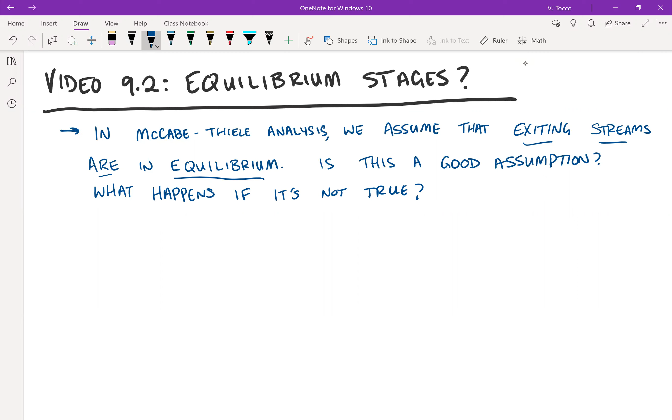So first, in order to understand what equilibrium is, we first have to understand what's actually going on when vapor contacts liquid in a distillation column. So here's a cartoon that I just drew. Vapor bubbles are contacting the surrounding liquid, and this interface between the bubble and the surrounding liquid is what mass is transferring into or out of. So stuff is evaporating from the liquid phase to go to the vapor phase, and stuff is also condensing to go back from the vapor phase down to the liquid phase.

So in order for these two things to actually reach equilibrium, I need sufficient surface area, and I'm talking about surface area of vapor bubbles to the surrounding liquid. And I also have to have sufficient time. I have to have this vapor and this liquid contacting each other long enough for equilibrium to occur. Now, how long does equilibrium actually take to occur? That's something that you might be able to determine experimentally, but oftentimes we don't have a really good estimate for that. So you may want to overestimate, but then there's no real good way to control that either.

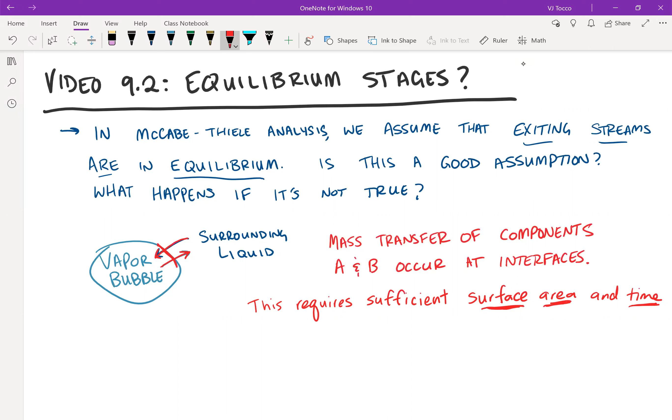So instead of having an equation that accounts for the surface area and time in a lot of detail, how it's usually accounted for in practice is with the concept of a Murphree vapor efficiency. So the vapor efficiency has a variable name E sub mv, and it quantifies deviations from equilibrium. So in this formula, Y sub n is the actual composition of vapor leaving stage n. Y n plus 1 is the actual composition of vapor coming in from stage n plus 1. So remember, this is the stage below.

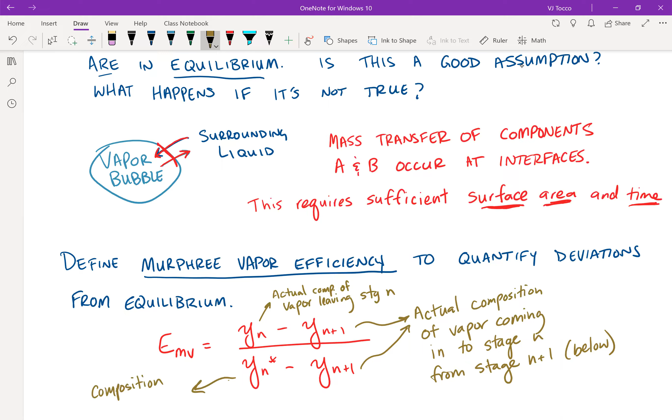And then finally, this Yn star is the composition of vapor that would be in equilibrium with the liquid leaving stage n. So by breaking this equation down a little bit, you can easily see that if Yn is equal to Yn star, that means that the actual composition of vapor leaving stage n is equal to the composition of vapor that would theoretically be in equilibrium. And if this happens, then E sub mv is equal to 1 or 100%. So that means I have a perfectly efficient equilibrium tray if my vapor is actually getting to the theoretical equilibrium that I have. So how does this help you in practice?

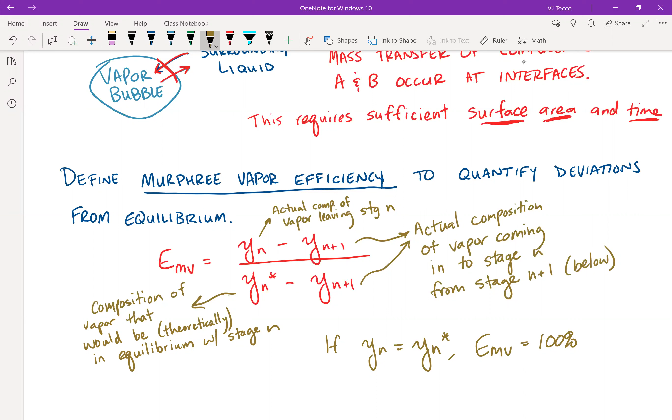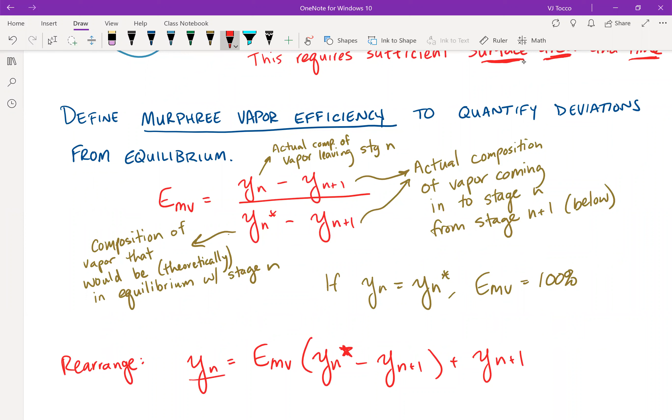So what you can do with this EMV equation is rearrange it to solve for Y sub n. If I rearrange this Murphree vapor efficiency equation, I can obtain Y of n is equal to EMV times (Yn star minus Y sub n plus 1) plus Y sub n plus 1. And now this is an equation for Y in terms of Y star, right? Well, not a straight line, but you can derive it by knowing what Y of n star is. So I can substitute that. For Yn star, you can substitute alpha xn over 1 plus (alpha minus 1) xn. And these are all things that you would theoretically know. The last thing you'd have to do is to estimate what this EMV is.

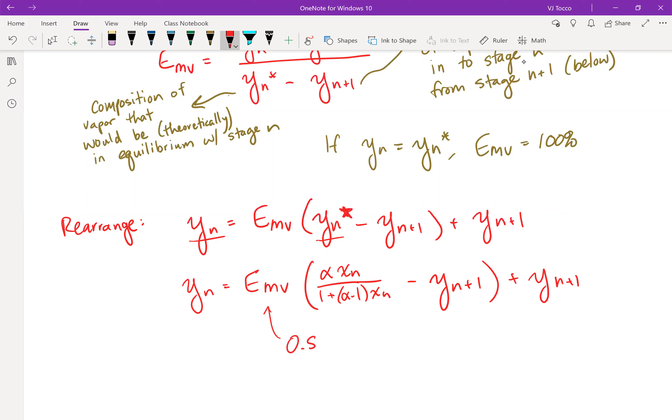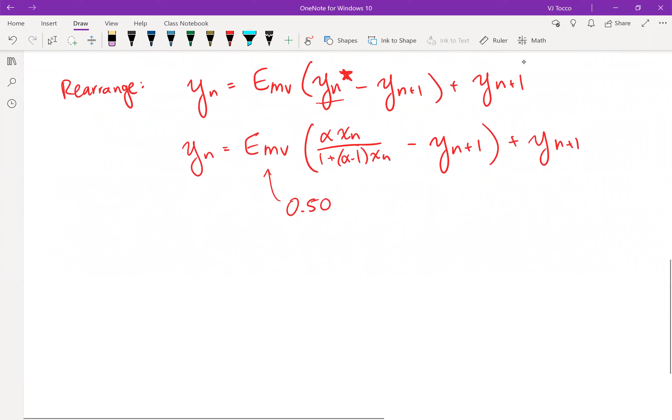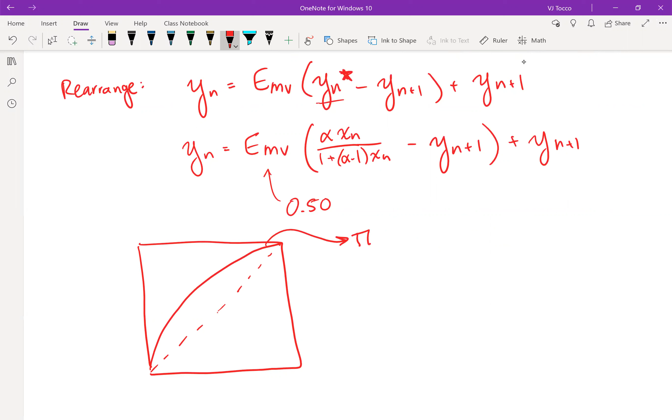So in practice, if EMV is a number, say it's 50%, so 0.50, then you could plot what the actual equilibrium curve would look like. So on our typical YX diagram, let's say I have an equilibrium curve that looks like so, just like it usually does. And you could plot this just by choosing a range of xn, so 0, 0.01, 0.02, and so forth, all the way to 1. And you could then plot what Y of n star would be with the alpha equation, so you'd have to know what alpha is. Now by knowing these two, I can then plot yn with the equation that I just wrote above. The only thing I would need to know now is what EMV is.

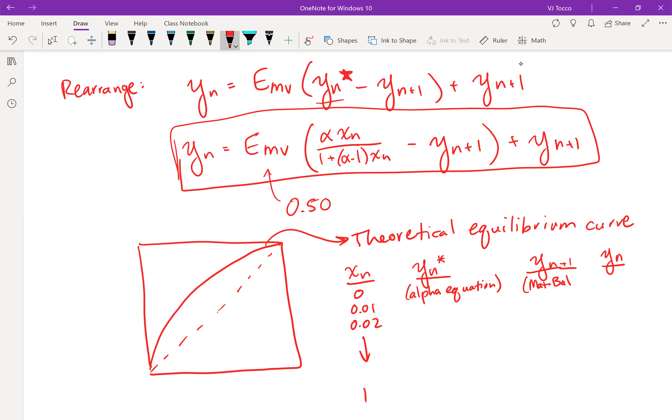Actually, sorry, I forgot about one thing. You also have to plot what y of n plus 1 is. And to do this, you also need to know what the material balance would be. So you'd have to plot the operating lines, right? But that would be a function of xn, and if you define the range of xn, then you can calculate what y of n plus 1 would be. And then from there, all you need to know is what the EMV is, and then you'd plug this into the Murphree vapor efficiency equation.

What would actually end up happening is you would sketch in this equilibrium curve, and what I'm plotting now in green would be called the pseudo-equilibrium curve. And it should be a little bit inside what the actual equilibrium curve is. And that would make sense, right? Because if your plates aren't as efficient as you hope that they are, then it's going to have the same functionality as reducing that relative volatility a little bit. It's called the pseudo-equilibrium curve.

Okay, so when you plot your operating lines now and you start stepping stages, the only change would be, instead of stepping off of the equilibrium line, you're stepping off the pseudo-equilibrium line. And once again, as you can envision for yourself, if the curve is in a little bit from the actual equilibrium curve, you're going to need more stages, which makes sense in the context that a stage is oftentimes not in equilibrium and therefore not as efficient as an idealized stage. So that'll wrap it up for this video.